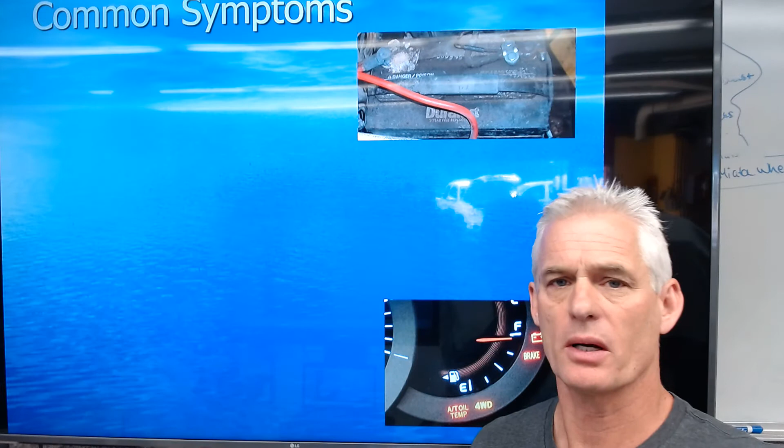In the previous video, we talked about charging system fundamentals, which was components and function, and I gave you a little bit of a video clip on charging system parts under the hood on that 03 Toyota Tundra. So today, we're going to talk about diagnosing a charging system.

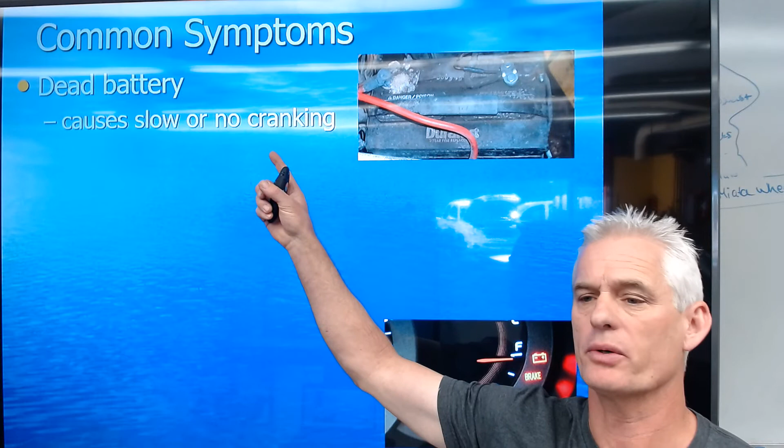First, the common symptoms of a problem with a charging system: we get a dead battery, with slow or no cranking. You can see in the picture this battery's obviously got a high amount of corrosion around the positive terminal. Negative's not so bad. Battery's dirty, corrosion on the positive terminal.

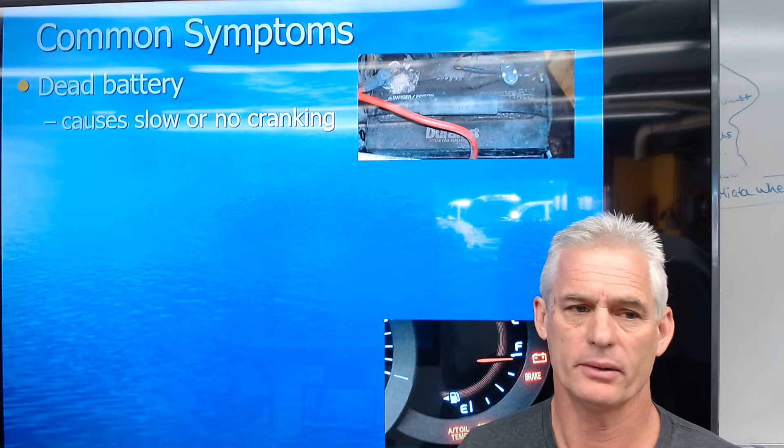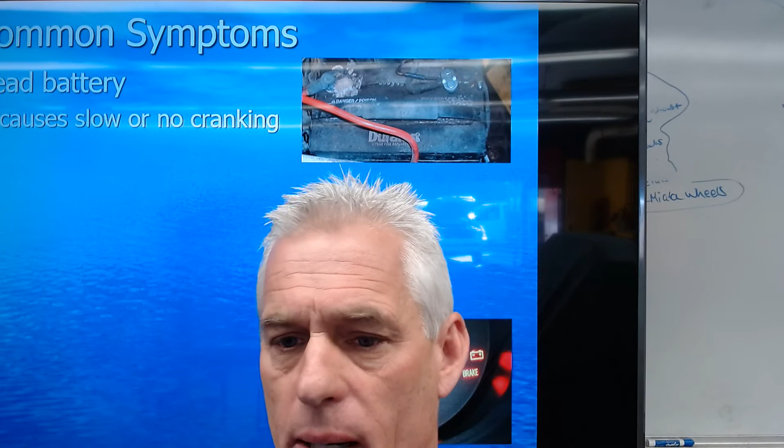Battery condition is going to be the number one cause of why you have a dead battery, in addition to somebody leaving something on. But if the charging system isn't charging the car because of bad cable connections or something like that, you might think that's a charging system issue, and really it's not. It's really just battery maintenance.

A dead battery certainly can be because the alternator's not charging the battery. That's why really the intention of saying dead battery causing slow or no cranking, because your battery's weak since it's not being charged properly.

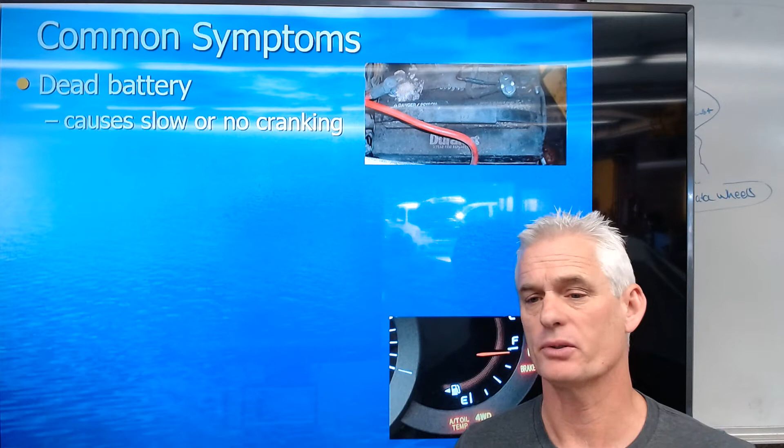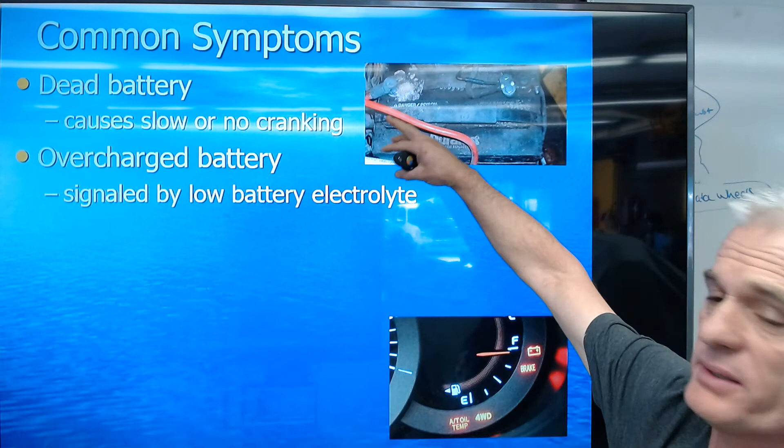Second, an overcharged battery can be signaled by the fact that you've got electrolyte all over the top of the battery. You've got all kinds of white deposits on top, and you may actually be, believe it or not, boiling the battery because it's getting too high a voltage, which can be caused by a defective voltage regulator or a diode in the alternator that can overcharge the battery.

This is pretty rare, you don't see it very often, but headlights will be super bright. I did see one that was holding 16 volts, and the headlights were super bright, and the battery water was actually boiling out of the battery, with white deposits all over the top. The reason this can be signaled by a low battery electrolyte is because you're boiling the electrolyte out of it, causing the water to come out.

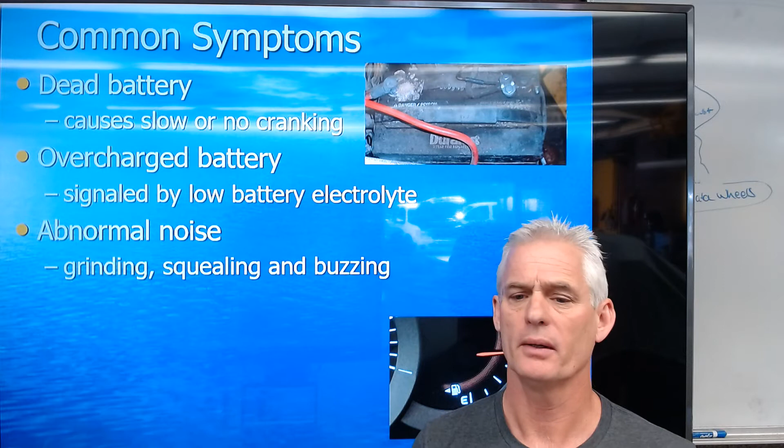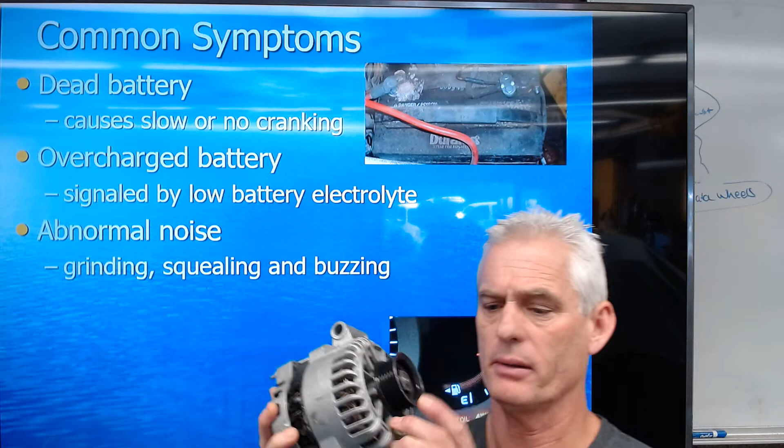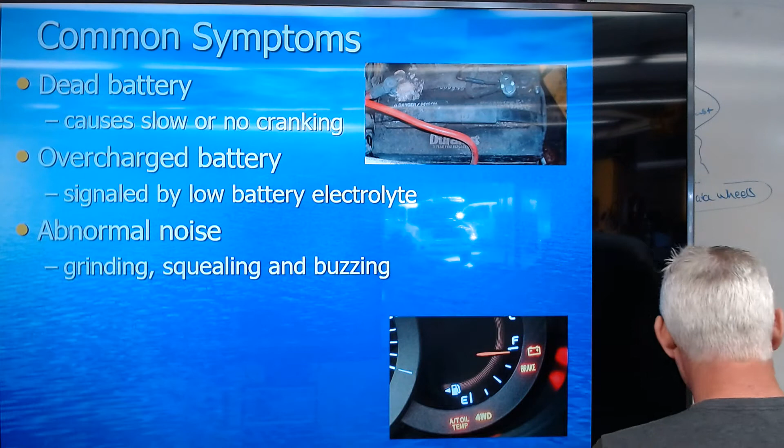Abnormal noises can be a sign of a defective alternator, a bad front bearing in particular. The rear bearing is smaller and doesn't carry as much load. The front one, which is right behind this pulley, gets all the force of the belt pulling down on the alternator, and that's going to cause that bearing to fail eventually.

So any kind of grinding, squealing, or maybe a buzzing noise could be something inside the alternator, typically a bearing, but diodes and some other things can make noise too.

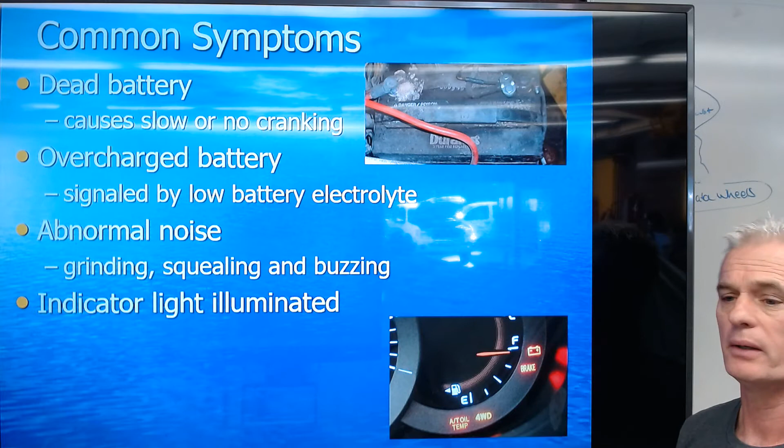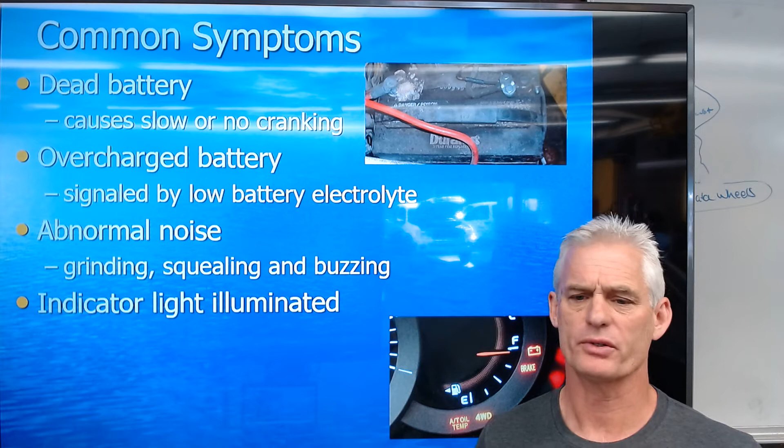If your indicator light on your dash is illuminated, so your battery warning icon is on, that means your charging system is not charging the battery. It's not a battery problem, it's a charging system problem. Or like the 03 Tundra we saw in the video, that has both a dash warning icon and the voltmeter, could be an issue there. So those are some of our symptoms: dead battery, overcharged battery, abnormal noises, charge indicator light on.

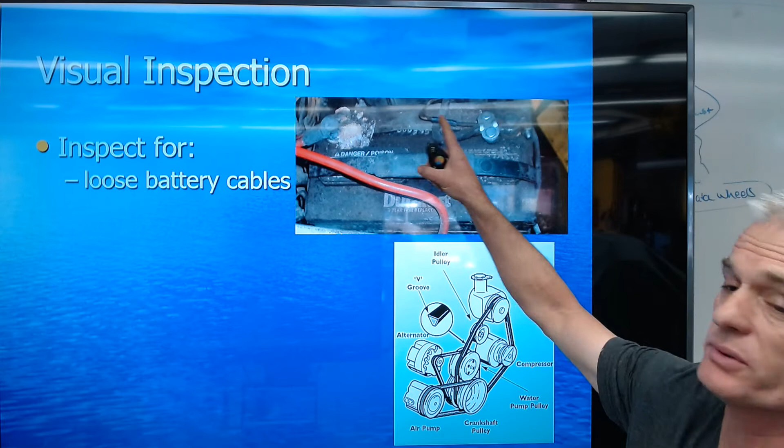Okay, so visual inspection, what do we want to look for? The first thing we want to look for is loose battery cables. If they haven't been tightened, I guarantee you don't have a good connection and they're not going to be charging right. Corroded terminals, like you see in this picture here, a very corroded positive terminal.

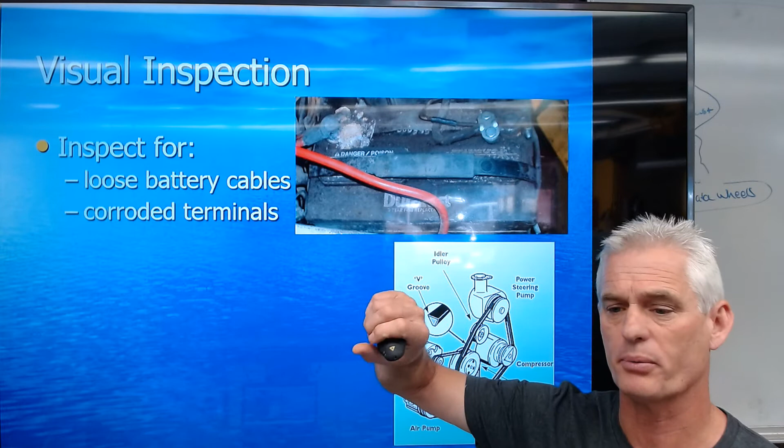So we know how to clean that with the scrub brush, and we can take baking soda and water and neutralize the acid. We can take our battery brush and clean the battery. We did all that when we did the battery service. So battery service is super important to the starting system, charging system, battery system. Low electrolyte, somebody's not kept the water full, and the low electrolyte level is going to be a cause of a battery that's not charging properly and not being charged properly.

Okay, so we got to keep the water full. A discharged battery - just because we may not be charging it, so we're going to go look and see what the condition of the battery is. If the battery's got a low state of charge, then we're thinking maybe the alternator's not charging it.

A damaged battery case - this can happen. Somebody goes four-wheel driving and the battery gets pitched. A lot of times the clamps that come across the top of the battery rust away because of the acid and corrode away, and the consequence is that the battery can get pitched into the fan and then maybe start leaking electrolyte, and then it's not working right.

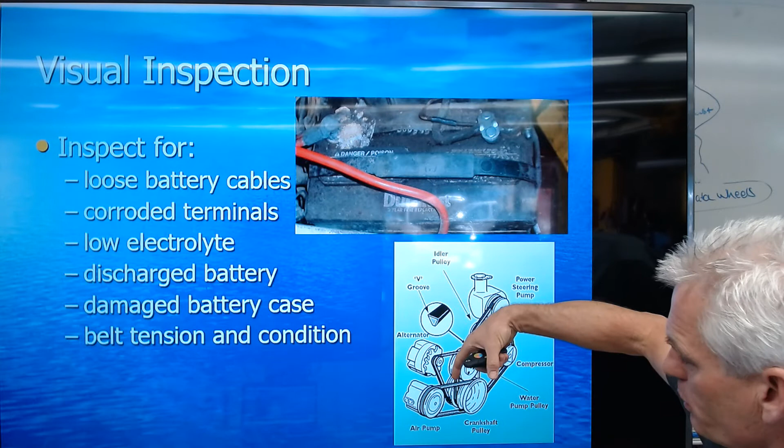The belt tension and condition - so we're going to look at the belt tension. On a V-type belt like this, if we push in the center of the span between two pulleys, we should get no more than a 1/2 inch of deflection. We measure it with our tape measure on a 12-inch span. So if it's a 6-inch span, we only want a 1/4 inch deflection.

On the serpentine belts, if it has a serpentine belt, we have gauges to measure the depth of that. I think I'll remind you of that and pause the video to go grab one to show you.

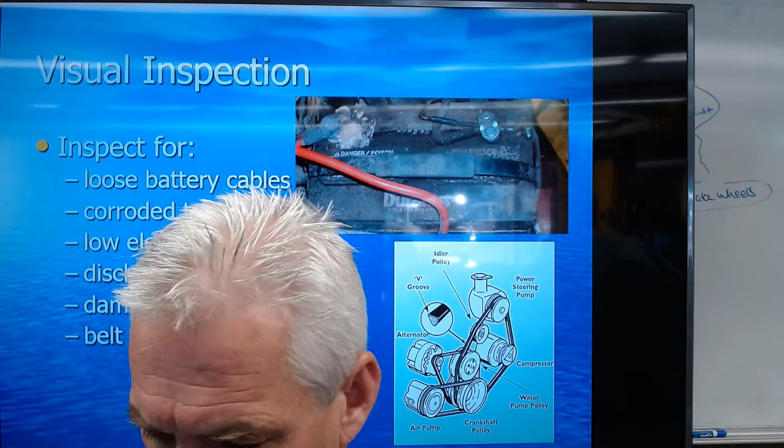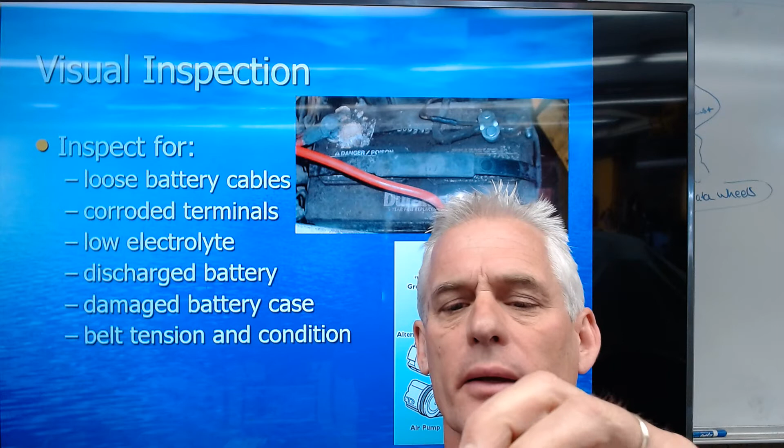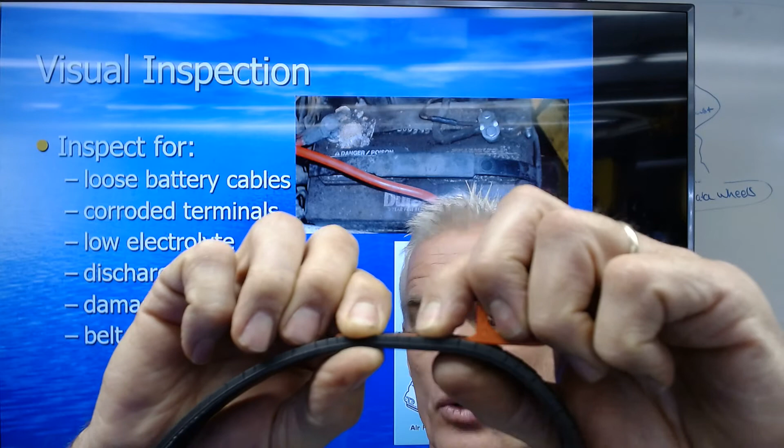Okay, so I've got a serpentine belt here. This one's obviously in really bad shape - you can see the cracks and so on. The correct way to check this is to take one of these gauges and lay it into the groove, and you're supposed to be able to see, if you turn it, the orange gauge or feel it. If it's flush like this one is, or recessed, the belt grooves are worn by the pulley and this belt needs to be replaced.

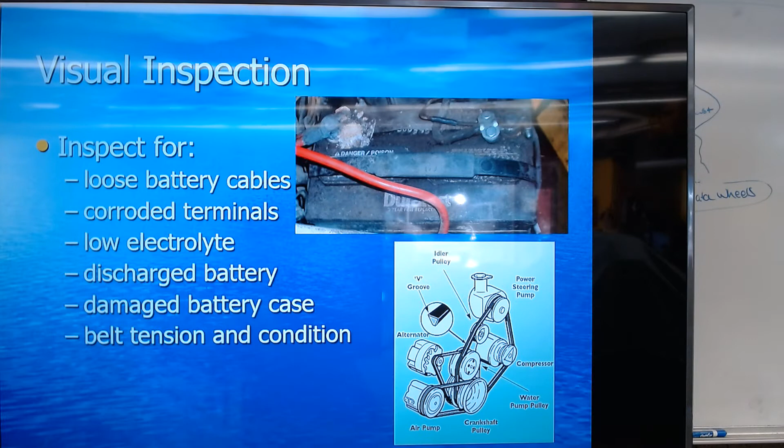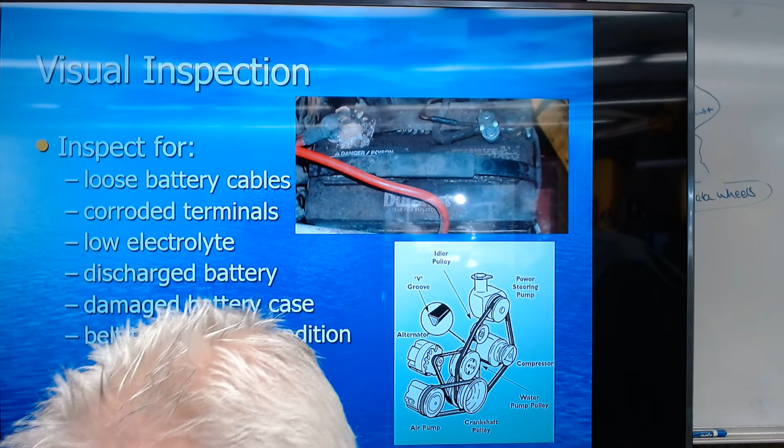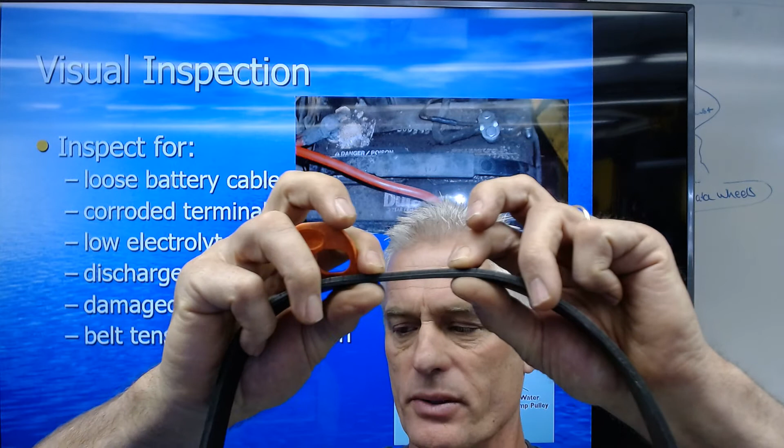Okay, so first, here's a serpentine belt that's obviously really cracked - you can see all the cracks, you can see chunks missing out of it. The Gates company that makes belts and hoses has these gauges. I'm going to show you two different styles. Here's one, and when you put this in the groove of the belt like that and turn it sideways, you're supposed to be able to see the gauge. If you can't see it, that means the grooves are worn by the belt to the place that it's sinking too far in there, so this belt needs to be replaced.

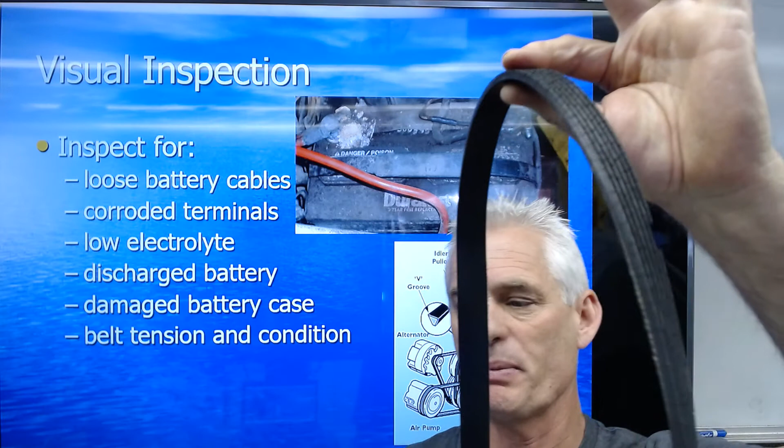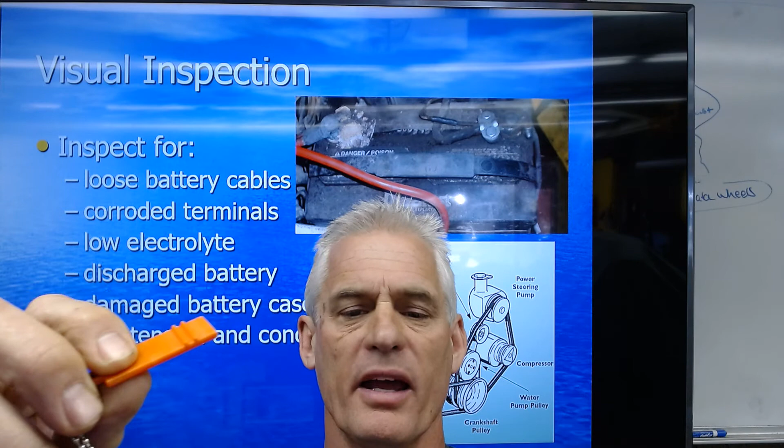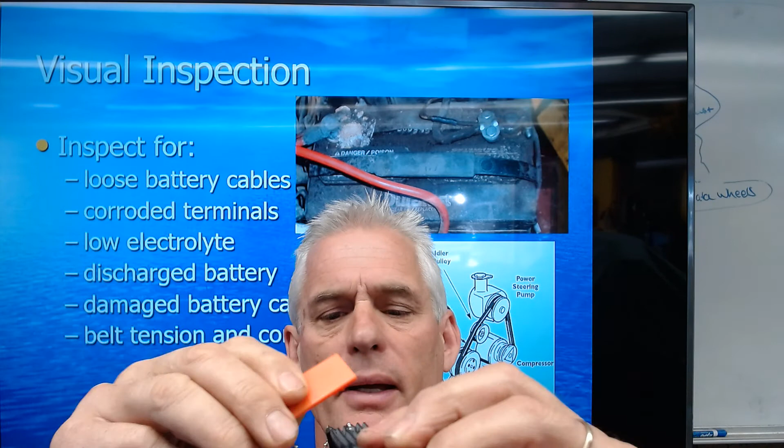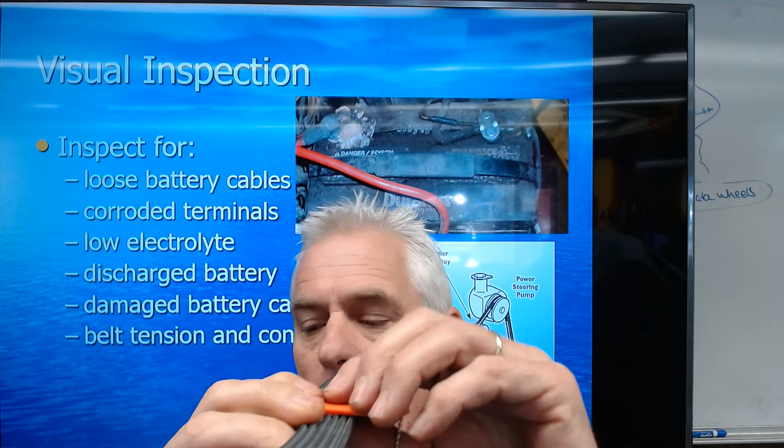They also have another style of gauge that just has these two little plastic ribs. If I put this into a brand new belt so you can see it hopefully, and put it into the grooves there, you're not supposed to be able to wiggle this around. Here's a worn belt - when I put that one in there, now I can move this guy all around, so I know this belt is worn out.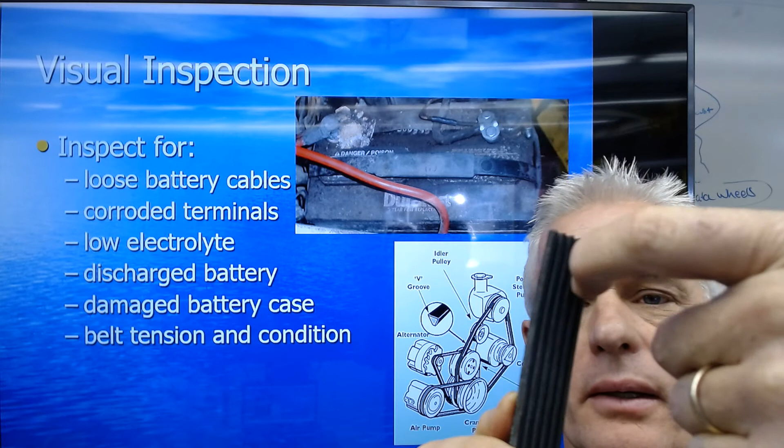So the pulley grooves, or the pulley teeth so to speak, will eat into the belt, and that's what causes them to go bad. Let's continue along here.

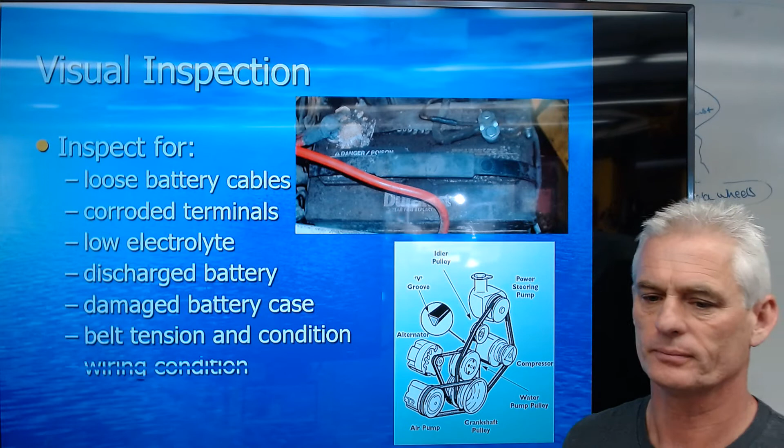So next is wiring condition. We can look at the wiring harness and the wires underneath the dash and see if a rat's been eating on them, or they've corroded away, or some kind of thing that happens so we don't have a good connection somewhere.

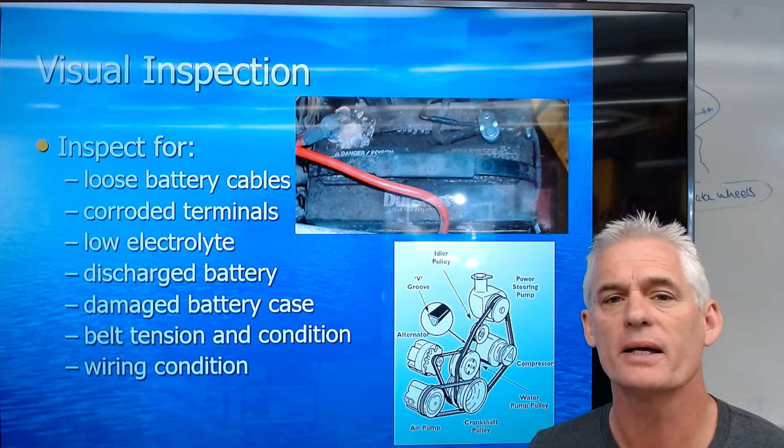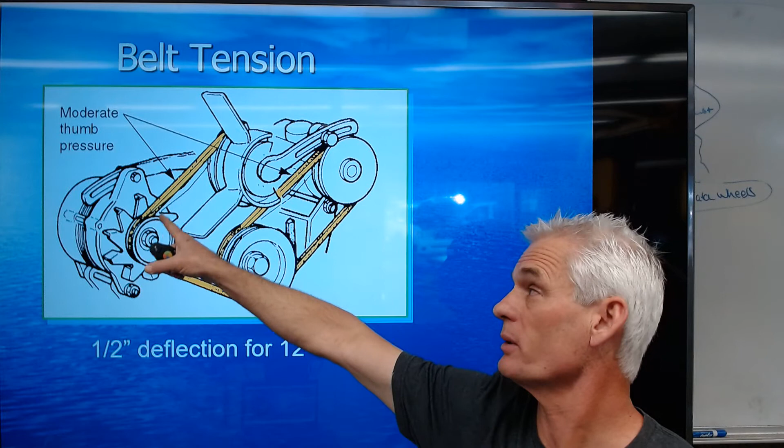Here's a picture of an old school belt tension, or just showing belt tension. It says take moderate thumb pressure in the center of the span, and you're supposed to have no more than 1/2 inch of deflection, that is the belt being pushed down, for a 12-inch span. So if there's a 6-inch span from pulley to pulley, you should only deflect a 1/4 inch.

I will say this, even though they say some cracking is normal, what I usually find is when the belts are cracked like that, they're super dry and they tend to be noisy and squeaky. So we like to replace them to get a nice soft rubber belt so it wants to ride smoothly and not make so much noise. Okay.

This is just showing you how to adjust a belt. This is a V-type belt with a lock nut. We're going to loosen the lock nut, then pry the alternator out and tension the belt, and then tighten it up.

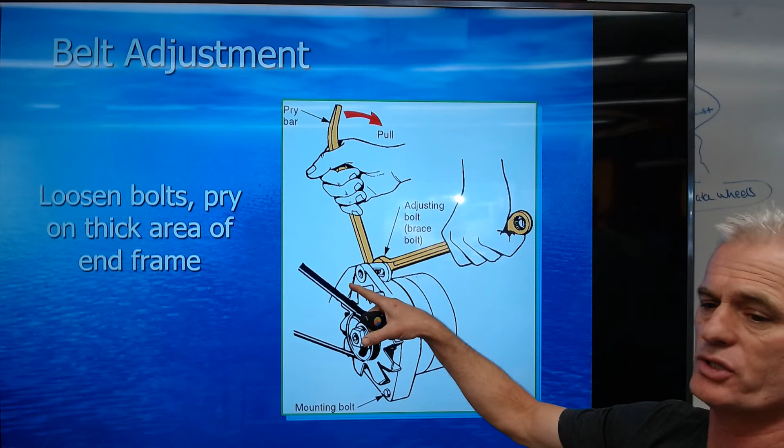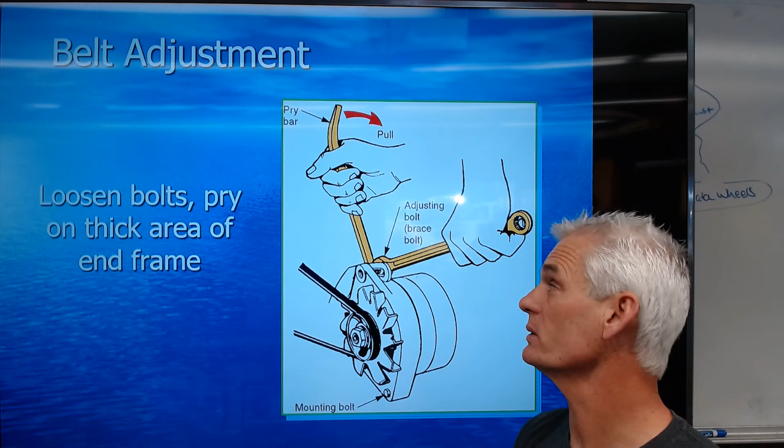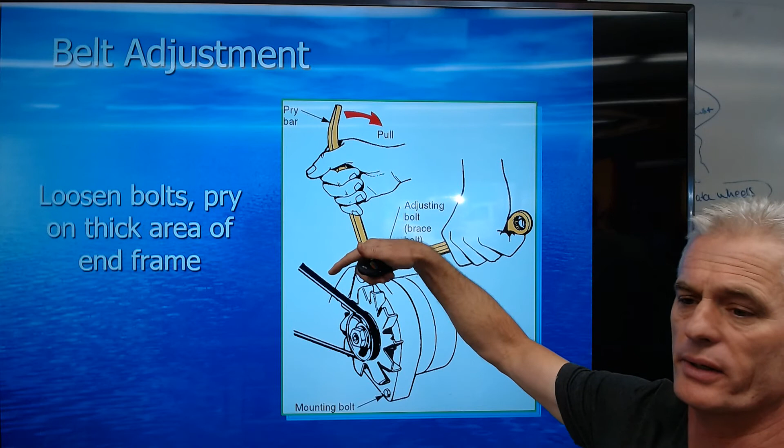More modern cars have spring-loaded tensioners on the belts. Most Hondas and Toyotas don't do this anymore - this was kind of an American car thing. They'll have a tensioner device where you loosen a lock nut and turn another bolt, and that puts tension on the belt. So, a couple of charging system precautions - we'll talk about these next.

Remember, you can't get electrocuted by a battery or an alternator, but you can get burned by the high heat of high current discharge. You never want to reverse polarity - that means you don't want to switch the cables to the wrong side. That's really important; you'll definitely pop a bunch of fuses. If you hook up jumper cables wrong or a jumper pack wrong, you're going to damage some fuses and maybe a computer module, but most times just fuses. Still, you don't want to do it because it's a hassle to figure out.

We're not going to operate the alternator with the output disconnected. That was something we used to do old school, but you definitely don't want to do that now because you can fry wires and you can also hurt a control module or computer.

There is a thing called an alternator output test that measures the system current and voltage under maximum load. It's not something we do in this class, but I just want you to know there is a way of looking effectively at whether the alternator produces the current and voltage it's supposed to under maximum load. This test is becoming somewhat antiquated because modern cars don't want to let you do this, but they will have you turn on certain accessories and then measure how much current is actually coming out of the alternator to decide if it's doing its job.

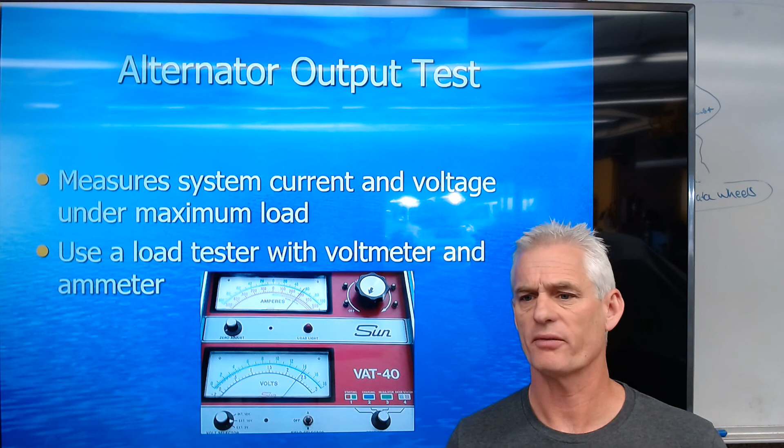We use a load tester with what's called a voltmeter and an ammeter. This is an old school analog one - we have digital ones now for this. Here's the equipment connections, just how you hook it up, but you don't need to worry about this or take any notes here. The machines in the shop have the instructions posted on them so you can see.

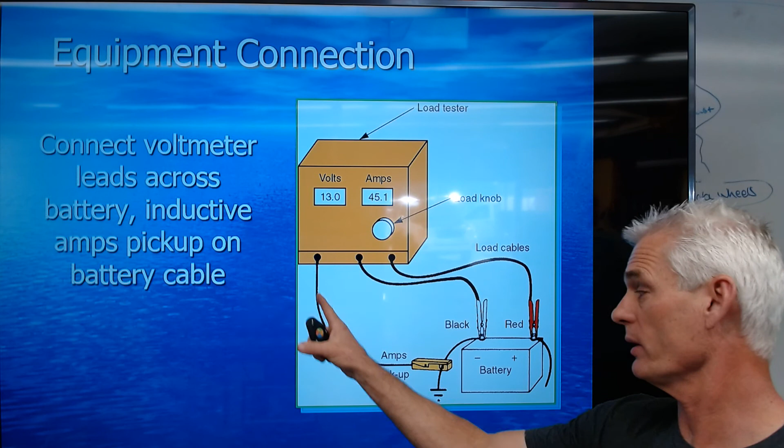Basically what we're going to do is start the car and crank up the load, trying to suck current out of the battery, and the alternator is going to try to backfill. So we're going to see the current here at the inductive amps connector - how much current the alternator is actually charging the battery with. We start the engine, take it to 2,000 RPM, and load the charging system up until it drops down to 12 volts, and we're just going to read the amperage output.

Again, you don't need to take notes on this. I'm just exposing you to the idea of a charging system output test, alternator output test. Okay, that's it. Thanks so much.